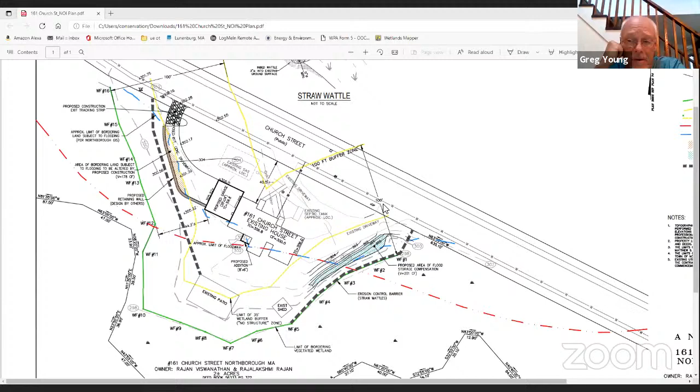Okay, I'm missing something. I had a question about a left-hand turn. Okay, left-hand, the driveway that's proposed. Mhm. Okay, left-hand turn, direct coming off the street. So you mentioned that if they moved it, it was going to become more of a left-hand turn driveway. Well, the question I was asked was why couldn't the doors be moved over here and then you just basically turn straight into the garage from the road?

The answer to the question is it goes right over the existing soil absorption system. It goes right over the septic system, and we're trying to avoid that. Oh, I heard that one. The other point was moving the existing driveway a little bit to the right, still respecting the SAS as it's there now, coming closer to it, probably not over it. But the comment was made that there would be a left-hand turn driveway which was trying to be avoided.

Okay, I can ask the engineer about that too. One of the things I can have him do is draw out a sketch plan with different alternative configurations that we could examine at a subsequent meeting. I guess my question, looking at this, is does it have to be an attached garage? If it was detached, could you angle it so you could still get in there with the curved driveway?

I could try that, but the point of the attached garage was so that Raji's husband would be able to enter and exit a sheltered area due to medical issues for getting in and out of the vehicle. And I'll speak to her about it, but that was the premise for the garage.

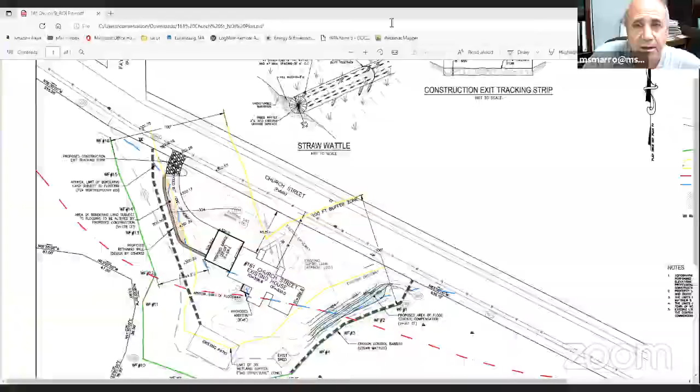I'll stop my share here. There we go. Can you see the street there? Church Street, and I think we're looking over the leaching system or the SAS, right? Yes. I'm about to sneeze. Okay, then this is where the garage would be.

And that's it. So Matt, in this area here, would the proposal be to dig out some of that area that we're looking at? That is correct. It would be regraded. It would be graded down.

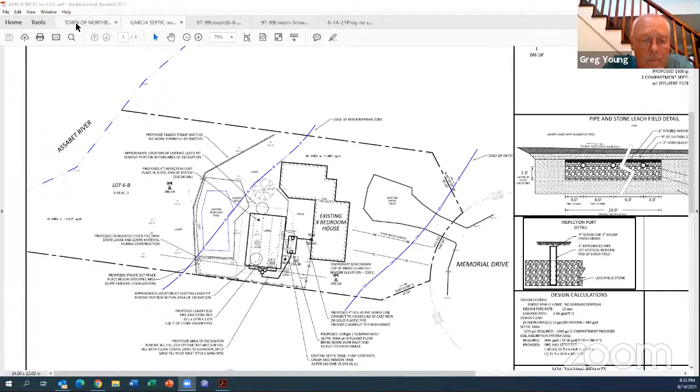I'll get those. Hang on. Can you see the tree? Yep. Okay. I don't know if you can see these, Mark. Can you see these? I can see those. Yep. So I think you're talking, you want to go right where that little tent is now, right? Or right around there. Right where the tent, or is that an umbrella or a tent? That, a tree cover.

I would back up a couple slides if you could, Mia. Right here. Yeah, right there. So the far corner of the house, the new tank would be put in that corner right there in that area. And then between the house and the pool area where that umbrella or little blue tent structure is, the leach field would go in there. That tree would remain, and it would be close to the hedgerow that's in the background.

You can get equipment in and out easy enough there? Excuse me? You can get equipment in and out? Well, it's tight. There's not much room on the side lot line, but that's the only access, so it's the only way to get in. So side by where the fence is, the other side. If we came in on the other side, we'd have to take that tree out.

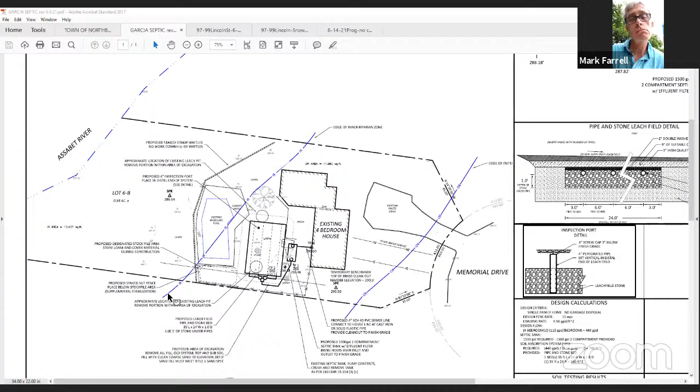Questions from the commission? No questions from the commission. Let's see if we have any public attendees. Any questions from the public? No hands up. No check in here. All right. It's pretty straightforward replacement, so. Yeah, not many options, if any.

I make a motion that we issue an order of conditions for 11 Memorial Drive for septic replacement. Actually, we need a motion to close the hearing. Okay, I'm sorry. I make a motion to close the hearing. Second. Second by Todd. Roll call. Tom Beals, yes. Dan Clark, yes. Diane Gouldner. Diane, you're on mute. You're still on mute, Diane. Okay, how's that? Okay. Yeah. Todd Helwig, yes. And I vote yes.

Okay, now I'll make a motion. Any special conditions for the order? No, sorry, let's issue the order. Before you issue the order, I would like to recommend street sweeping because there's a catch basin in the street. Maybe protection of that catch basin. No problem there, Mark, right? No problem with that, not at all. And otherwise just the boilerplate for septic. Any other special conditions? I don't recommend permanent markers. No, I mean, yeah.

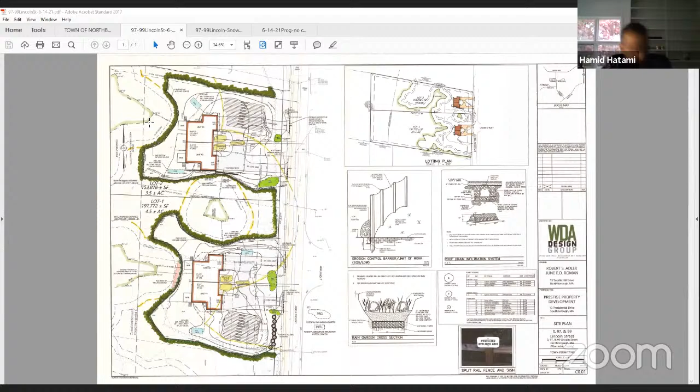Yes, so we have two duplex units proposed. We went initially through the design review committee a while back, and then we told them we needed to get the wetlands nailed down. We worked out some of the architectural stuff during the design review committee.

One, these are the actual architectural plans that Hamid has gotten. They worked out some things on what color the siding and all those things will be. The little landscape islands you see in front of each unit in between the driveways were things that were requested by the design review board that we show. So those are carryovers.

As you mentioned, Mr. Chairman, the wetlands, we delineated and had those confirmed via an ANRAD a month ago. This design incorporates the proposed driveways to each unit, the proposed septic systems. Now, the septic systems are outside the 100-foot buffer zone. That's a result, where DEP will go 50, the local board of health and the conservation regulation is outside the 100-foot buffer zone. So we've shown those outside the 100-foot buffer zone.

These are based on an 8-bedroom septic system. That is, there are 4 bedrooms in each unit. So lot 1 would have its own septic system for that duplex, and lot 2 would have its own system for the 2 duplexes to the north.

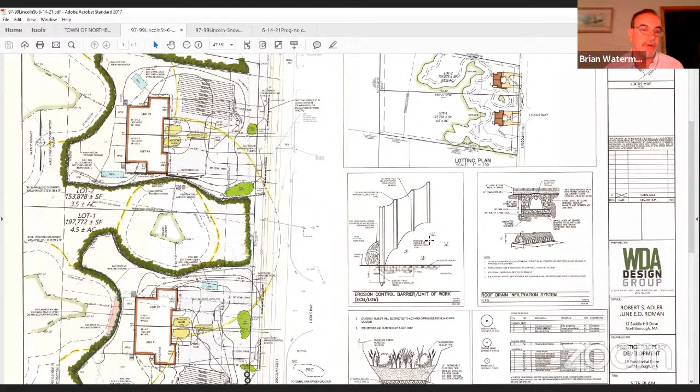The infiltration systems you see highlighted in blue, 2 for, if you want to look at the north or south lot first. Yeah, the north lot's fine, Mia. Those have been sized by our engineer to take, the one to the north there will be unit 4, would take care of unit 4, and the one to the south for unit 3. Those have been sized for a 1/2 inch runoff from each roof.

And those have been sized to do that, as well as sited and the elevation set on those per some of this additional soil testing that we commenced last week with witness testing, and also additional exploratory testing. So we have a really good idea where groundwater is. So all that is based on what we found from the soil testing, the type of soil we have.

We do show 2 rain gardens there that are kind of in that yellowish green towards the edge of the road and off the side of the driveway. Those are sized to take each driveway itself. We know we have great infiltration, so the runoff from each driveway, if it doesn't infiltrate on its own, we have directed to what's called an ACO brand trench drain in the end of each driveway. So any runoff on that limited area of pavement will be directed to a rain garden.

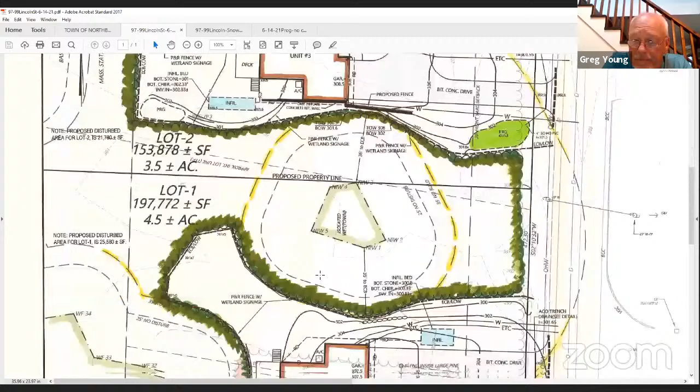So again, to the south, if you can see the squiggly tree line here underneath, it's kind of shaded in the background. This is the area that previously had some historic clearing. And then in the bottom right-hand corner of the lot, you can see there's an old house foundation shown. That was from the 40s. I'm not sure when that was taken away, but the clearing was more recent. Where's the foundation, Brian?

Down there to the right-hand corner, you see that square right there that has... Oh, that? Yes, okay, yep, got it. That was the historic location based on the 1940s plan. I don't know when it disappeared. It's kind of hard to tell from the record plans we have. But it does show that there was some work on this land many, many years ago.

But some of the more recent tree clearing, I think, was in 2014 or 15 on this lot. It's become successional. It's got 8 to 10 foot high knotweed on it now. It's got aspen and multiflora rose and some other invasives as well. So the dark green line shows the proposed tree line.

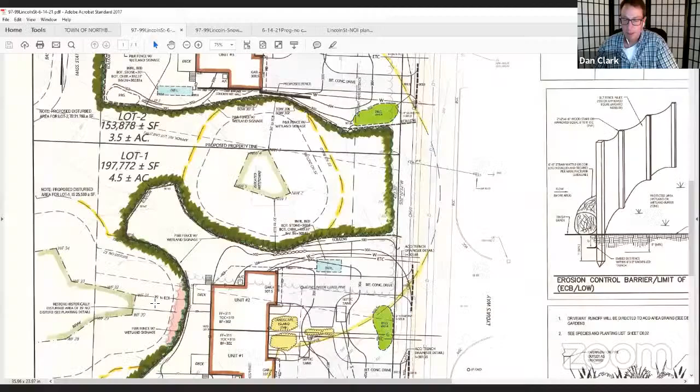Can I ask a question while we're waiting, Greg? Yep. So on the plan, you have the rain gardens and infiltration listed as potential. Is it that you just haven't picked a final location, or is there existence potential? I mean, are they gonna? No, the infiltration systems are set. The rain garden, I didn't change the label from potential rain garden because we had other ones that were potentially going to take roof runoff. But now that we've done the additional soil testing and actually sized and set the infiltrators, these rain gardens, yeah.

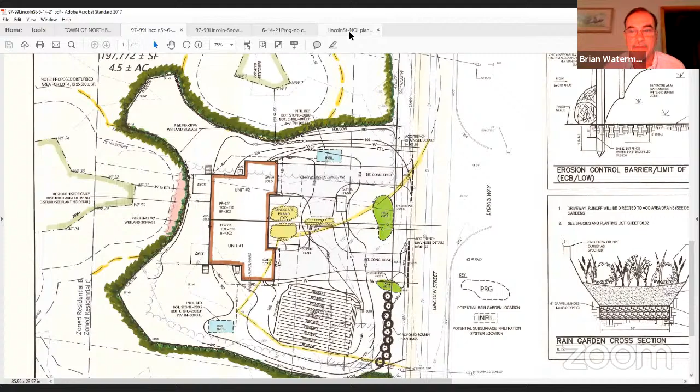And I know Mia has asked for more detailed planting and species on these, so we'll be finalizing those and submitting a more detailed outline, and those will be the official rain garden designs. So the next set of plans you get before the next meeting will have the true footprints and the exact plant species and number of species for each one. Okay, thanks. Sure.

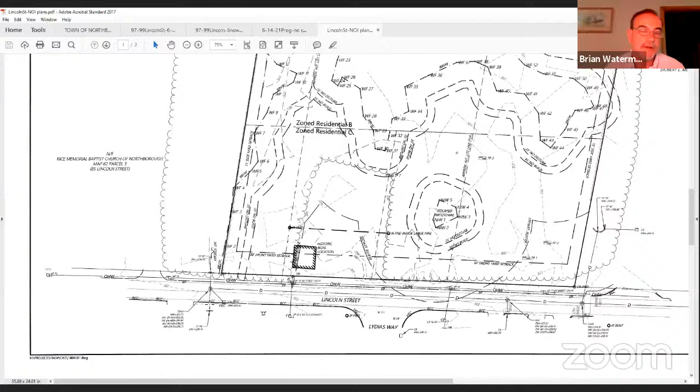Oh, you were there a second ago. Oh yeah, there you go. The rotation of this plan is obviously 90 degrees, but you can see the intermittent stream is labeled to the bottom left-hand corner there. Yep. Okay, yes. So there's flowage along the church side, and also intermittent flowage coming from the back area of our wetland that goes into that intermittent stream. It discharges through a 15-inch culvert to the south and to the east and flows. It eventually connects down to the brook farther to the south, east, I'm sorry. I'm all turned around now. This plan is different rotation.

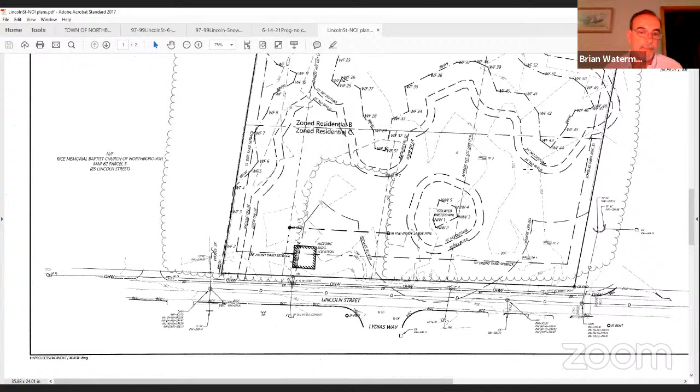But yeah, there's no 200. The perennial stream is several hundred feet to the south of that. Is that Hop Brook or one of those?

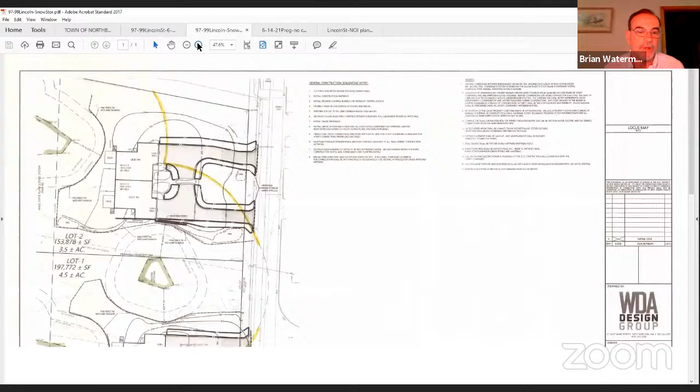On this second plan, you'd asked about proposed snow storage. So I've outlined those on here in the thick dashed lines. We left the rain gardens and some of the other supplemental plantings on here, so you can see they're not within the snow storage areas, because we don't want snow stored within or on top of the rain gardens. The dark evergreen circles you see on the south lot, those are screen plantings because that'll be a raised septic system.

So those are additional screen plantings we'd be adding along that edge. They're raised on one lot, not on the other, Brian? The other lot, it doesn't really need to be raised because we have such good soils and depth to groundwater there. Just by the nature of grading this site, you won't see its own mound essentially on the north system. So just the natural grade to get up to the houses there, it covers that system with plenty of cover. This one, we anticipated we would have a higher groundwater, and that's why this system would be raised.

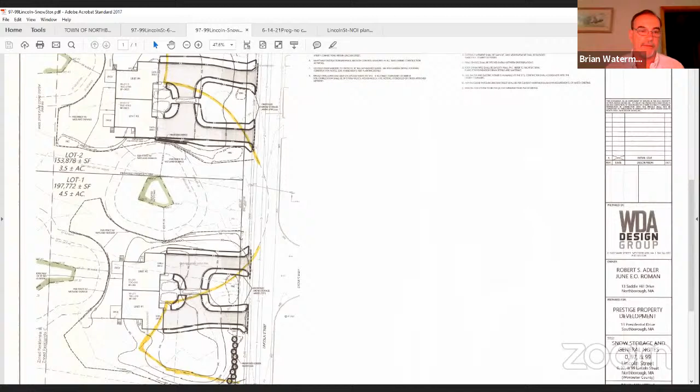Okay, Mia, we have no DEP number yet, correct? That's correct. No file, no comment yet, okay. So we knew we wanted to get this initial presentation. A lot of this set of plans addresses a lot of the initial comments you guys had. And the next set of plans will obviously have the formalized rain garden plantings. It'll have all the calculations and the elevations for all the stormwater infiltrators. We do have the detail for the ACO trench drains for the driveways. So we'll get that added and have the final stamped plans to you shortly. But if there are any additional comments from tonight or from the initial questions you emailed the other day, we'd be happy to add those and take care of them in the meantime.

Mia, do you have any questions that you wanted Brian to clarify? I had a couple things where I did recommend that I don't like putting deed restrictions, but I think this property would need one, and I gave him a sample of one. In addition to that, I'd like reference to the operation and maintenance, or maybe reference to the order, and then we could append the operation and maintenance plan to the order.

Yeah, I assumed you'd be attaching the O&M to the order. Yep, and then if we could get a deed reference to the order. And then, did you provide a construction sequence?

Yeah, it's on that snow storage. Oh, there it is, okay. We may expand on that once I... if there's anything else that the developer wants to, if something's out of sequence, we're going to add something else in there. But yes, there's a draft one on there right now.

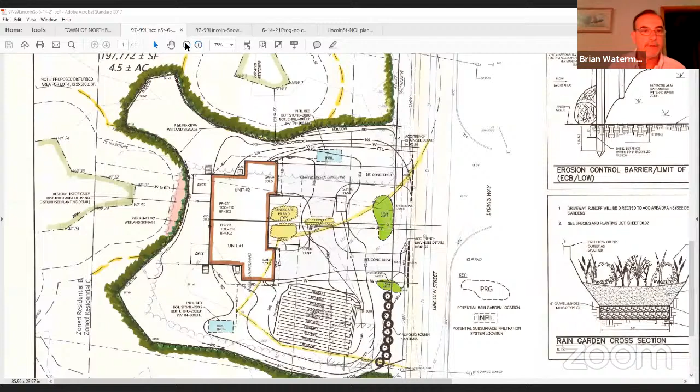And do you know if you're clearing more than an acre? Can you go back to the site plan, Mia, please? I put those numbers on the plan. I know that was one of, so over on the left-hand side, if you zoom in right where it says lot 1 and lot 2, maybe. Here? You can see, note: proposed disturbed area for lot 2 is 21,780. Proposed area is 25,580. So we're at about 46... just over 47,000. So just an acre and a third, I guess, total.

Okay, so I would recommend SWPPP reports from an environmental monitor weekly as a condition. So that could just be put in the order of conditions and then maybe submitted directly to you guys. Yep, just email it as a PDF. Would that be every week or just after like a quarter or half inch of rainfall?

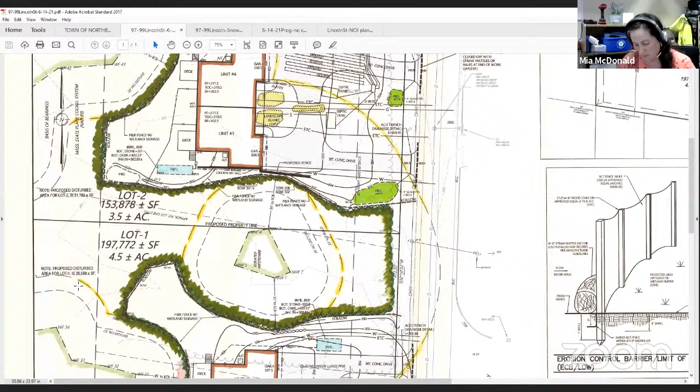Are you guys filing an NPDES permit? Is it considered two separate lots? No, they look at it as total over 1 acre. So yeah, just copies of those same reports. Okay, and those are required weekly. Yeah. And email PDF is fine. Or PDF by email.

That is for you, Mia? I think so. Any commissioners have questions or concerns or comments?

I didn't mean to wander out, but are the roads going to be kept clean with this, with a lot of traffic, school buses and all that, how are they going to handle it?

Hi, Diane. One thing that's not shown on here is a track pad at each driveway. We're also closing off the driveway at night with straw wattles. And I would imagine the applicant will have to commit to street sweeping as well.

As far as, you know, when construction starts and when school's out or school's in, there may have to be something discussed about, you know, when construction starts, if school buses are... I think school starts by 7:50 in the morning typically. I'm not sure when they're getting released for summer and going back, but obviously the contractor doesn't want to be trying to move in and out of there fighting school buses or school traffic. So I'd imagine they'll probably adjust to whatever the school system's timing is.

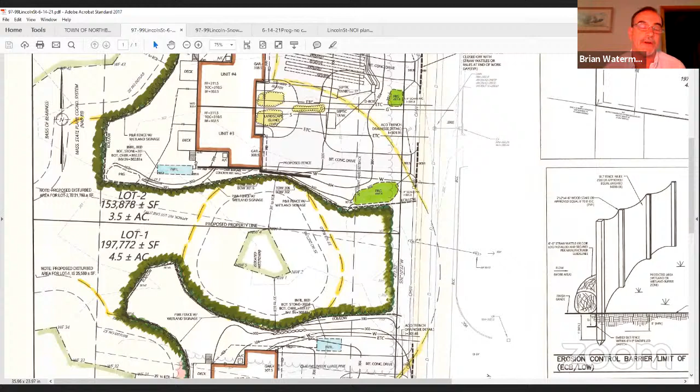But other than that, like I said, the way the site is graded and it's so flat, with the erosion control barrier, there's not a lot of room for stuff to flow off the site as it rains. The biggest thing would be potentially tracking dirt into the road. And again, we'll be adding the track pad at each driveway or construction entrance, and then closing it off at night with the straw wattles. And again, it's very flat, we don't have a steep slope pitching out to the road or coming down a hill. So I would imagine we can control dirt on site pretty well on this particular project.

Okay, Ryan, do you have a date for planning board yet?

No, we're working on it. I would think those are the questions you're going to get from them, around this, how you're going to interact with the school traffic. Yes, we anticipate that'll be one of them for sure. I mean, they know of the project between the design review board and some initial informal discussion, but yes, we'll be filing formally with them shortly.

Yeah, it'll be a very visible project, right? With all those cars coming out every single day back and forth. So, any more questions from the commission?

I don't know if we have any public comments.

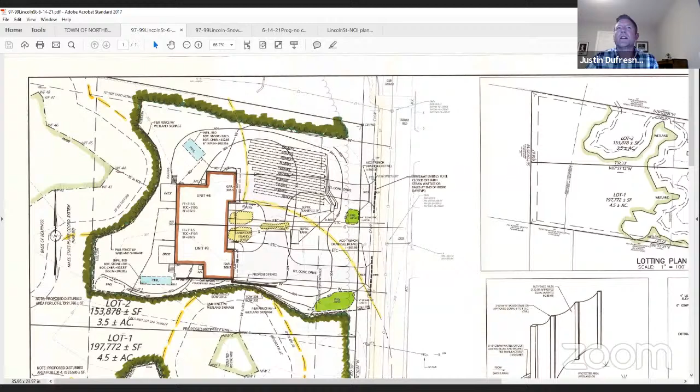Brian, just a quick one on my end. Those ACO trench drains, I think work pretty well. Can you just make sure the last section of those has a sump on it? They make them so that basically it's a standard pitch across the bottom of the drain the whole way, but you can buy the very last section to have a 2-foot sump, and then the pipe comes out above that sump. It just gives you a little bit more area in there to trap some sediment and stuff before it goes into the rain garden. So it doesn't screw up your invert or anything getting into the rain garden, but it does give you a little bit of volume in there to trap some sediment.

Oh yeah, that's good. Actually, I think I did see that on their other detail we have. So like I said, we'll be adding the ACO, but I'll make sure we have the one with the 2-foot sump. Okay, thank you.

Any public comment? Any questions from anybody attending? I don't see hands up. Take a look here again. No. Nope. So we're going to continue this to next month.

Is next month good, Brian, or do you need more time? No, that'll be fine. July 12 meeting, right? That'll be in person, I believe. Yeah, been some discussion on that. I have an in-person in Sudbury Wednesday night, but on Thursday we have the option of in-person or virtual at another town. So I don't think we've got -- the governor's supposed to announce some formal policy here, so guess we'll see. I'm not sure if we're going to go hybrid or full. Right, yeah, but we'll plan on seeing you guys in person July 12th.

Okay, we need a motion to continue. So I'll make a motion to continue 97 and 99 Lincoln Street to next meeting. Second by Todd, I'll second that. Very good, we'll do a roll call vote.

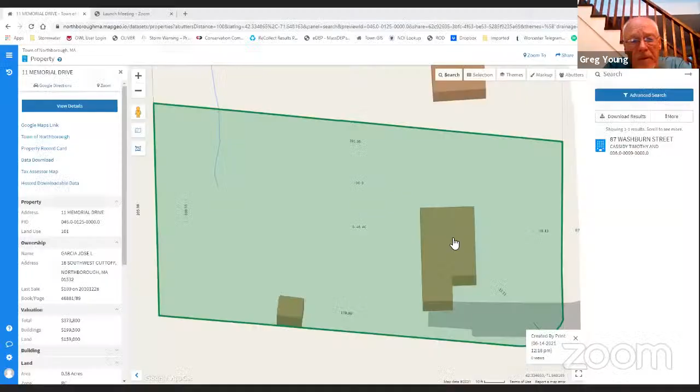Is it near that development of those 2 or 3 large homes that were built off Washburn Street? A little bit. Can you see my town GIS? Yes. So down here is Harrington Lane. Yep. Okay. Craig Callahan's project came before you earlier this year because they're trying to finish up the project. So this is that wetland system, and it comes from the north here. It comes in from the south here, goes under the street, and then drains this way to Barefoot Brook.

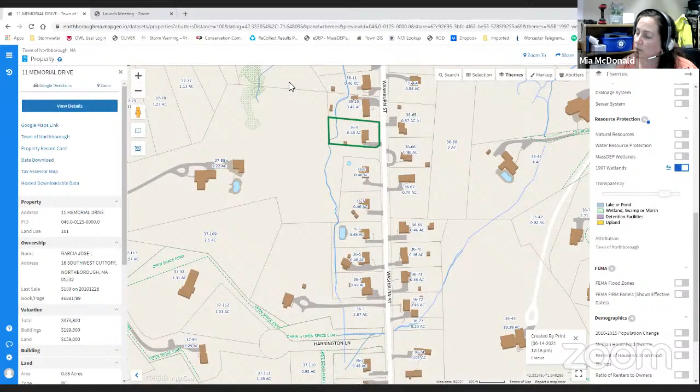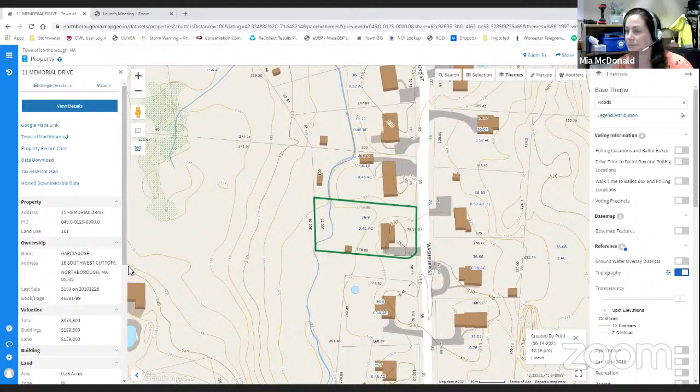And this is Washburn Street. This is 87 here. This is 190 Howard. And so this is the area we were walking. So this blue line really does continue straight down. And if I add topography, you can see how it flattens out a bit here. Oops, let me move up a bit. It flattens out a bit here. So the wetland's a little bit wider than the blue stream. The line continues there, so it's connected. Mm-hmm. Yep. Okay. So I can go back to the photos.

I don't think this is the root cause of all the flooding on Washburn Street. In fact, Mr. Cassidy and I were talking about some other drainage issues on Washburn Street that we're going to discuss. I'll talk to Fred Litchfield, the town engineer, about some poorly draining catch basins, things like that. But this area does need attention, and this could improve the flooding in the area a little bit. Wasn't the culvert under Washburn Street redone as part of the Callahan development? It was cleaned out. Mm-hmm. Cleaned out.

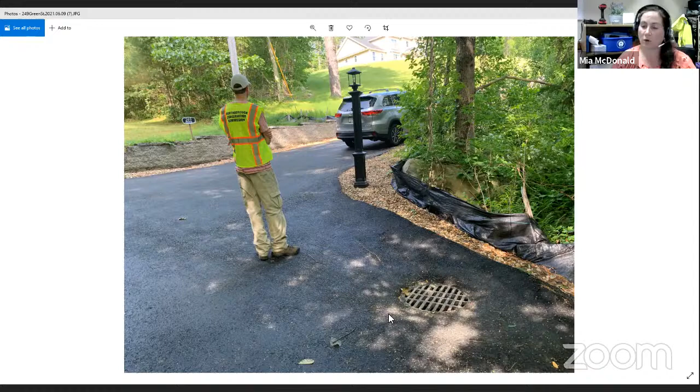And then the second thing that I noticed was this stone here. This is like a 1-inch, it's a beautiful landscape stone, but I have noticed it migrating. I don't know if I have any pictures. I mean, just a little bit at a time. It's not like pouring down the street. But after 2-3 years of plowing, I imagine it's not going to be here anymore.

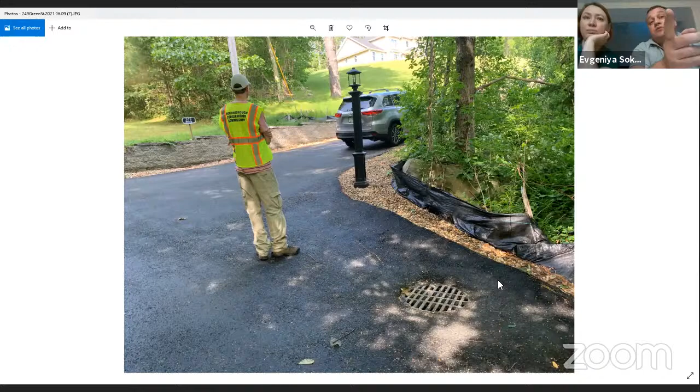Apologize for interruption, but we're not plowing, we're snow blowing that area. And you see that stone is remaining in that place for almost the year. We went through the winter and all that stuff, so that stone is still there. And plus that stone next to the wall works beautifully because it also works as a drainage towards the retaining wall, water retaining wall.

And we didn't have any water on the driveway during the winter time and the springtime and the fall, and whatever was coming up a little bit was still very clean, so it goes towards cleaning and retaining the water as well.

Yeah, there was some stone migration on the other side of the driveway. Do you have some pictures there too? No, I don't think I do. Okay. But there was, if you can show the driveway again, up the right-hand side, yeah, right there. As you go up from where that pointer is, along some of those rocks, there was some migration of stones over those rocks into the growth area.

We did notice that too. It was so insignificant, and our plan was just to push that stone a little closer to the driveway and maybe put some kind of bricks between the slope and the driveway to prevent the migration of the stone. But again, I'm so glad we put the stone over there because as a water drainage it works beautifully, because there is nothing on the driveway during the rainfall. So it works just better than we expected. Okay.

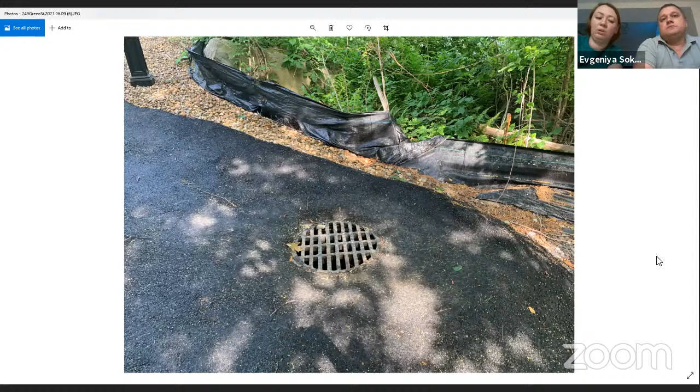Okay. So the catch basin is going to be eliminated? Yes, so it will be covered, and there is a small berm there, so it will be flattened and everything will be done. This is what we discussed back in December, but due to the weather and the season we were waiting until better weather to complete it. So yeah, the catch basin is not an issue. The only thing is actually the stone. Once again, we would really love for it to stay there, and just to put effort into not letting it migrate.

Questions, comments from the commission? I wouldn't have a problem with the stone if they could figure out a way to keep it from migrating down closer to the wetland. Sometimes we've seen what works pretty well would be something like that metal edging. I don't know if you've ever seen that. It kind of gets staked in and holds it in place.

And maybe it's a certain distance off the driveway, 3 feet or something like that, just to allow the water a place to shed off the driveway and then infiltrate into the ground, which typically works pretty well. I think it would be up to your engineer to propose something, but I guess I'd be in favor of trying to keep it, but then come up with a way that really holds it in place there so that it doesn't migrate down the hill.

So we were, this is my opinion though, sorry. So we were also suggesting, and we talked about the cornerstone, we're planning to install like a black landscape edging strip so that it's containing the stone within certain limits, so it's not migrating onto the driveway and behind the bigger stones. Would that hold it? Would that be strong enough to hold the stones?